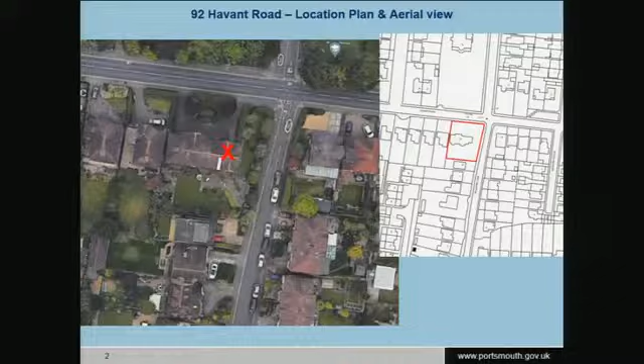So the application is up there in Drayton on the Havant Road. Very suburban environment with houses set back from the road, Havant Road, and from the side road, Mulberry Lane, including on Mulberry Lane on both sides. It's the corner property, you can see outlined in red.

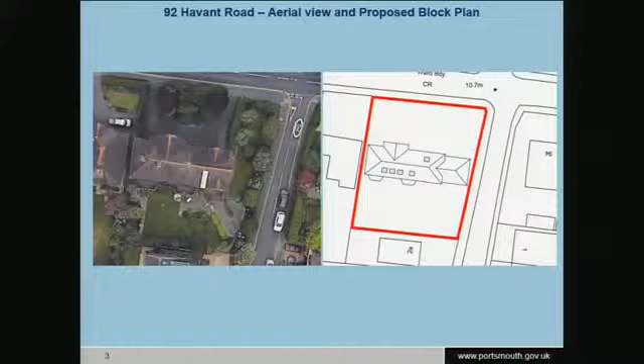Just in a bit more detail there. That is the side extension that is proposed, and then the other alterations and extensions and so on are around the rest of the building. I shall quickly take you further down in the slideshow to show the front and rear of the property.

I'll flick through back to the top of the show. There we are, back to that slide. So there's the site. The substantial 1.5-storey extension is on this side here, as you can see, up to the boundary at that point, just a bit off there because of the splayed boundary.

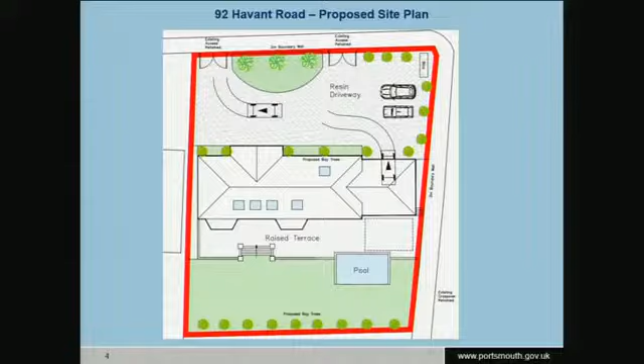And then we have a raised terrace at the rear, south facing, and a pool there. So there's the property you've seen as existing a few moments ago in the photograph. Suburban property, brick, half-timbered, etc. That's the minor gap in the rear elevation that they seek to fill.

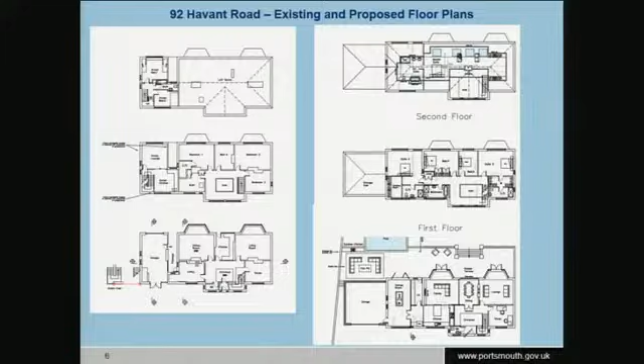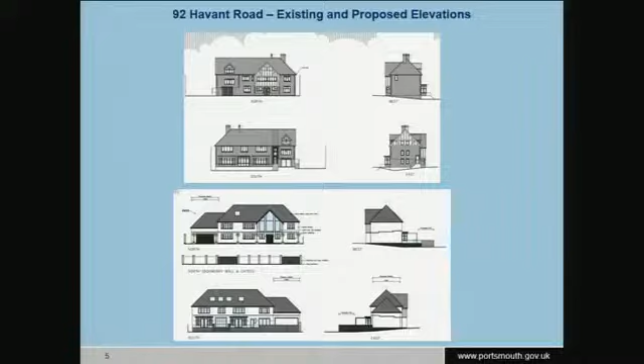We've had discussions with the applicant. We couldn't reach agreement. We were asking for this scheme to come a further metre off from the boundary and a further metre lower eaves, just to try and reduce the impact on that suburban lane.

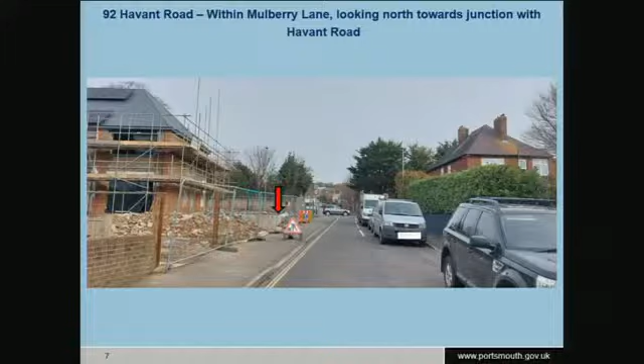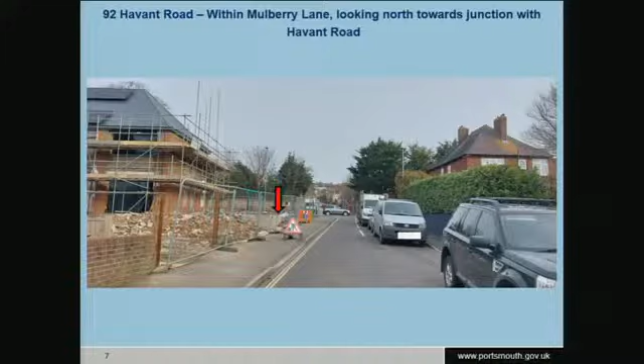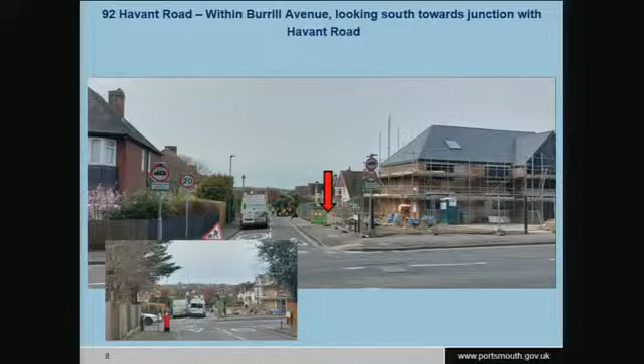Some changes already in evidence at the site: removal of vegetation, which doesn't require planning consent, and foundations put in for the proposal already. So you can see the position on the edge of the site that would appear. So there's the front boundary, northern corner from Havant Road, and the location of the extension to the side.

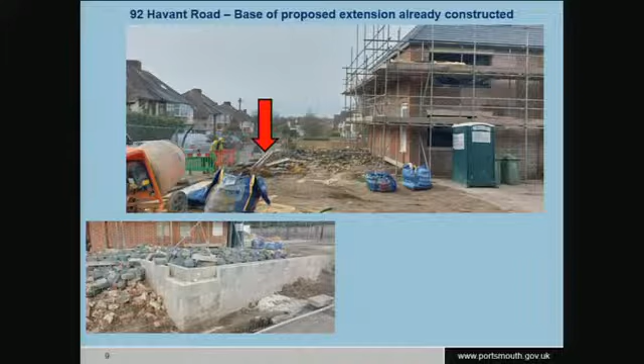That's on the edge of the site, as you can see. And there's, as was on Mulberry Lane, with the vegetation, and one has to picture now what will be proposed on the corner there. That's the long and short of the application.

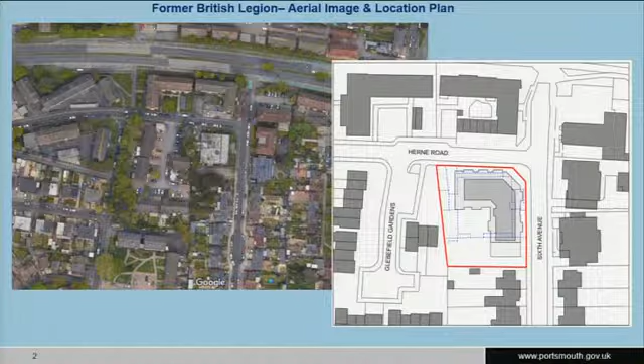In case we don't see another aerial photograph — we've got trees on the western side, just outside the site, which is why that area is empty. They're protected trees. There are also some conifers just outside the site on the southern boundary, in the neighbour's garden.

Here's looking south down 6th Avenue — there's the social club, here are the flats, and this is Herne Road running east-west. There's on-street parking on Herne Road, double yellow lines on the site frontage, and otherwise on-street parking in the area.

This is looking at the eastern edge of the site, with the next door property to the south. This is the eastern flank of the post-war development facing the rear of the social club — that gable end is there.

Some more pictures — there's the site on the left-hand side. The materials are quite a bright brick, I think, and some fairly buffy, lightish brick. I mention that now because of the materials proposed by the applicant. Here's the development sailing out, giving almost a 4th storey because of the land levels.

That's the blocked-off entrance to Southampton Road. This is Herne Road, so there's the social club, looking east. There's the church, a very attractive building, with its car park just there with access off 6th Avenue — the car park fronts onto Southampton Road. There's a 3-storey block of flats, the 2-storey community building use, and then 2-storey housing.

Right, onto the development. Here are the trees you can see that I pointed out earlier, and to the south as well.

So it's an L-shaped block, front door onto 6th Avenue, and a core all the way through to get out into the back and to walk around it, either into the car park or round into a substantial bike store.

So it follows the building or the back of pavement effectively, with an undercroft here to take you to the parking spaces here, a bit of a garden space, and 2 more spaces, car parking spaces off Herne Road.

The application was amended during its course to take off 4 flats, which also enabled more parking to get a better balance of flats to parking.

The pattern of development is a central corridor with flats either facing the rear or to the front, and they're a mixture of 1- and 2-bedroom flats.

That's the ground floor again. Here's the first floor, so there's the full footprint of development. Flats looking mostly front onto 6th Avenue, Herne Road, or south and west onto the rear of the site. A couple of minor secondary windows there that will be addressed by frosted glazing.

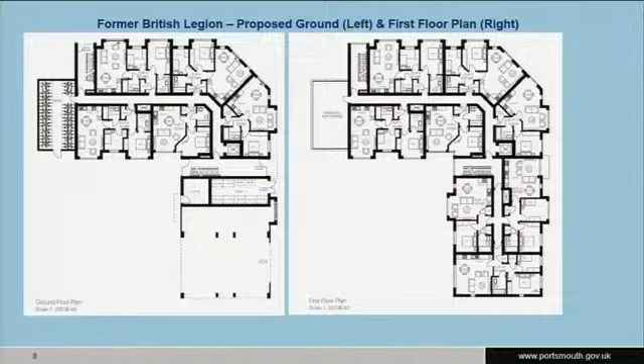So here's the 2nd floor, so 3 full floors, if you like, or nearly full floors of development. And this is the 4th floor, you'll see in a minute on an elevation. So it's recessed from the front, so it's a true roof additional floor, if you like.

So bigger flats with their own terraces. There's a terrace for that flat, there's a terrace for the 2nd flat, and a terrace front and back for the 3rd flat there. The other there is a flat roof just for maintenance access only.

This is what I call the principal elevation on 6th Avenue, so from the south heading up north up to Southampton Road with the increase in level across the site.

So this building also will need to slightly cut in and sail out at the other end, just like the flats. So this is a light-coloured brick proposed.

We would, if approved, deal with that by way of condition in terms of final selection. We've got a series of bays that provide interest to the site. This one looks a little bit flat, but you'll see in a moment a better 3D.

A base material, common practice, a darker base material to ground the site, and then a slate effect cladding to the recessed roof. So it would be pretty much read as a 3-storey building because of the recess of the roof, although it will be seen.

That's the front door. And that's the northern elevation to Herne Road, more of the same, really. Flats and habitable rooms.

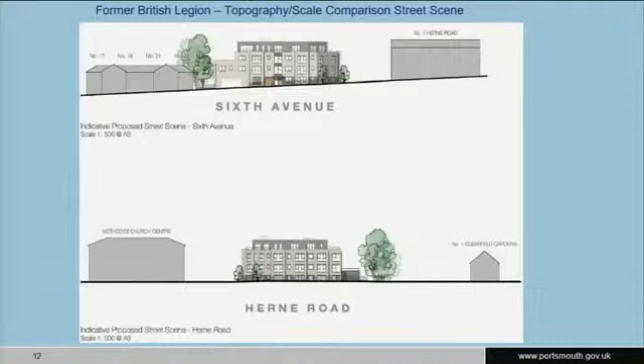There you are in a bit more context. The 3, almost 4-storey here, and the 2-storey housing to the south. And this is along Herne Road. There's a 3D to get a slightly better feel.

So we've got also architectural details. For example, apart from the articulation provided by these bays, which will give good shadow etc. and interest to the building, along with the choice of materials, and then the depth of reveals to the windows will also be important. I think the building will actually look quite good.

It's come to committee because of 18 addresses objecting, a variety of points which are set out in the report. But officers are satisfied about the scale of development, the adequacy of living arrangements, the lack of impact or reasonable impact on the neighbouring area and amenities, and the level of car parking in its sustainable location.

So that is why we're able to recommend it positively for you today. Thank you.

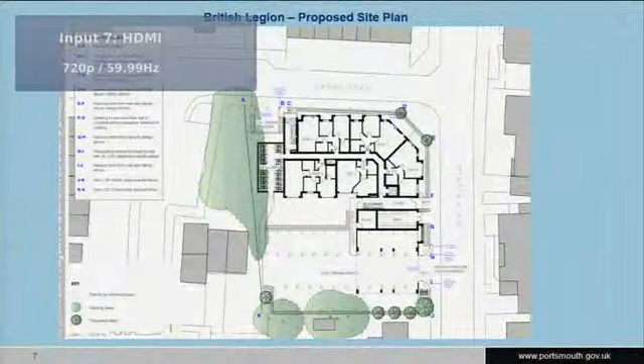Thank you, Councillor. Answering the question about the trees, there would be some minor trimming of the adjacent cherry just to the west of the site, which isn't deemed to be a difficulty for the health of that tree into the future. The trees on the southern boundary, because of the gap, are unlikely to require any trimming either. But although they're quite prominent trees, they're not protected trees. I don't see any difficulty if minor working space, for example, was needed to reduce the canopy somewhat. That would need to be in conjunction with the neighbour. And we do have the planning condition relating to tree protection during the course of the site.

So the tree matters have been looked at correctly in terms of existing trees. In terms of rainfall infiltration, nature conservation and landscape, I think there'll be a betterment here, which is what the Environment Agency and any planning authority would seek with new development. The betterment is because at the moment the site has drainage dating from the 60s or 70s, and I don't think there's any real infiltration on the site presently. This will at least have a relatively small lawn, but nevertheless a lawn, which will take some soaking in. And we'll have a full drainage scheme for the wider site to ensure the appropriate betterment and best measures are provided. We've consulted with our drainage consultants and drainage officer, who is happy with that, and full details will come with a condition.

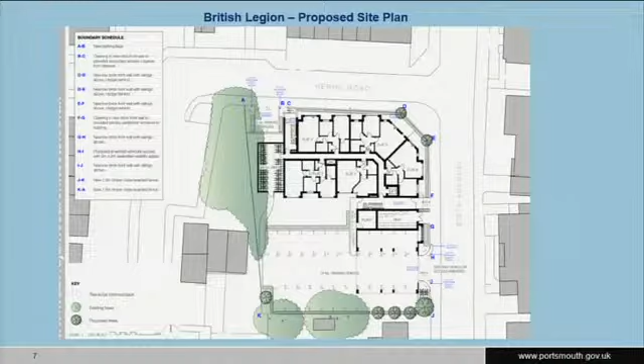Darren and then Hugh. Thanks, Chris.

I know height's going to be difficult, Simon, in this road because it's on a slope. But is the proposed scheme taller than the church, which seems to me the tallest building in the area? Excuse me. That's the church on the left-hand side.

I'd have to guess, Councillor, the church has got, it looks like 2 stories, but it's a church building with a different height. You can compare the height to the 3-story building adjacent. So I would guess the eaves height of the church building would be about the eaves height of the 3-story main body of the building, with the flat roof, recessed roof above. It's certainly within the scale of that building and the flats, the 3/4-story flats to the north. So if that's what your question is about, it fits in with the scale of the area. It would be on slightly lower land than the church as well. Thank you for that, Simon.

My other point concerns what you say in 10.12 and 10.13 of the report, particularly 10.13. It's around whether the scheme's viable, as you describe it, the developer's expected profit. In 10.13 you say the LPA's further analysis suggests that both a scheme with and without affordable housing may not reach the reasonable profit level. Now, we don't get many of those comments, so my guess is that you believe the applicant may not, but you believe that the current scheme will not reach the reasonable profit level. Is that correct? That's correct. Okay, those are my questions.

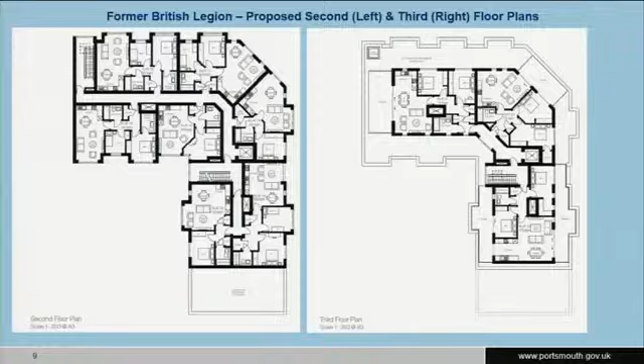Thank you, Councillor. I personally don't think it's so important because of the setback, which you can see here. That's a decent setback, a good couple of metres by eye. That's quite significant - lots of rooftops are only set back by a limited half a metre or something, or not at all. So that is a strong setback that is hard to represent in 2D, but it will be very recessive.

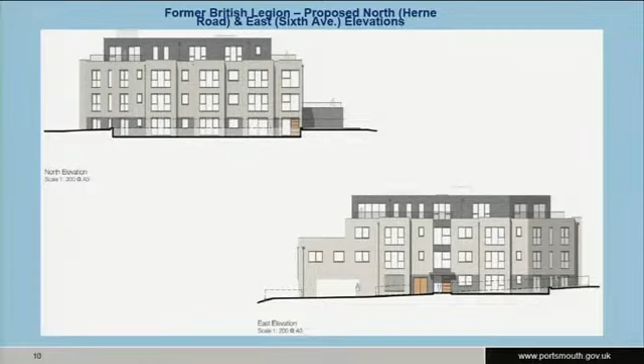Taking the east elevation, standing - this is the view you'd get from the first or second floor and the flats opposite, rather than from the public realm where you'd be lower down looking up. But I don't think it matters, to answer your question, that there isn't a window directly above this bay, because it's a different element of the building with different cladding, and it's set back.

Any other questions, members? Before we move to comments, Councillor Sanders. Chris, I propose that we defer a decision on this application until the 12th of April committee meeting. This is on the grounds of paragraphs 10.12 and 10.13 alone. My view from what I've seen is that I think this site should be developed.

However, for really the first time since the Kingston Prison development, we have a situation whereby a scheme with and without affordable housing - the scheme that was presented to the committee - may not reach the reasonable profit level, which in normal language means it's not regarded as viable in planning terms. I understand the officer's desire to have negotiations around how much affordable housing after a decision is taken, but...

I think, given that any scheme at the moment, with or without affordable housing, won't reach viability or the expected developer profit level, it seems sensible to have those discussions and then have the outcome come back to committee in three weeks, because we can't carry on for months with this. But a sensible period of discussion before a meeting would be useful.

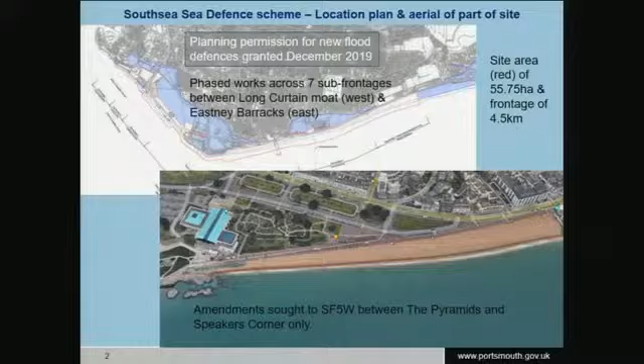The scheme is necessary to protect thousands of businesses and thousands of homes from sea flooding and all the resulting problems that would arise. Here's a brief slide reminding people of some of the storm events that have happened in more recent years.

Having briefly set out what the original approved scheme was 3 years ago — that scheme was on the back of the first tranche of funding from government, and once the first application had been approved, it was always known there would be another round of amendments for more detailed refinement and engineering. So the first planning permission granted at the end of 2019 then unlocked the second half of the government funding, which allowed the council and its partners to go on to work on the further refinement of the engineering, which is what is in front of you today.

That naturally resulted, and was always expected to result, in some changes to some of the details of the scheme, in this case sub-frontage 5. So the report sets out at bullet points in paragraph 12 the 4 broad areas: removal of the rock toe, improved public realm, soft landscaping, and reduced interaction with Southsea Castle, which is a scheduled ancient monument.

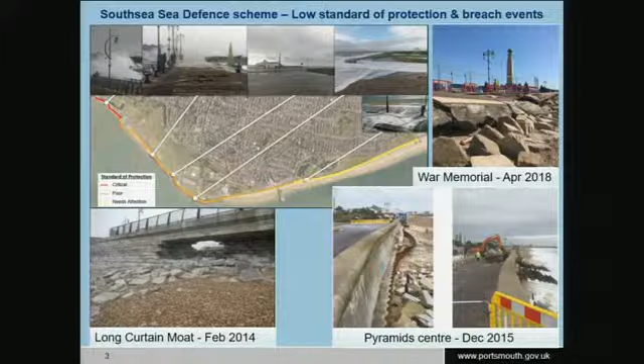So I shall try and take you through the principal changes. They're quite detailed and complicated drawings, but I'll make it as straightforward and digestible as possible.

Starting from the west, there's Southsea Castle and its eastern ramparts, grass banks and so on, and the pyramids just to its north. That was the approved scheme 3 years ago, which had a certain ramp rising up from in front of the pyramids up to the height of the promenade. That's been changed to, I think, follow more what is existing there, with a ramp down. At the moment there are only steps, so this is obviously for improved access down into the front. There's also been a remodelling compared to the approved scheme of landscape and levels.

Importantly, as the report sets out, the approved scheme had a strong intervention of a supporting wall into the eastern ramparts of the scheduled ancient monument, and obviously with any such structure you want the minimal amount of intervention. So with the second round of resource and further time to redesign, a less intrusive design has been arrived at for the interaction with Southsea Castle. It still provides the necessary strength and engineering, but it's less intrusive.

So in a nutshell, there are some more attractive changes with the steps, the paths, and some rounding off of the existing grass banks. So it will appear as a better solution than existing or previously proposed. In terms of the rock toe, that is the area at the top of the beach alongside the promenade.

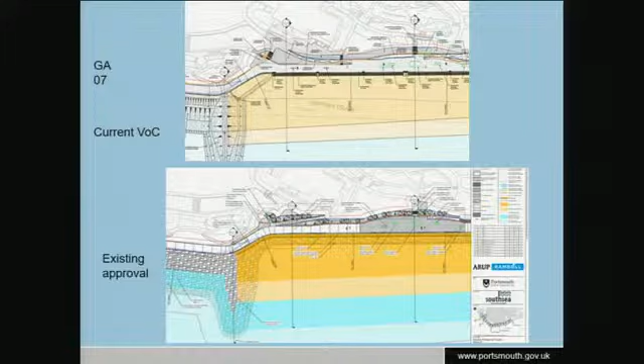So onto the eastern half, we have the Briny restaurant there, and just the lifeguard shelter to the west, just out of shot.

Some remodelling is occurring at Speaker's Corner, which is the area behind the shelters - that's the clear tarmacked area popular with skateboarders. That's been remodelled for ramps and some terracing. Previously there was a straight, vertical wall, which was less attractive. It's now being stepped down, and you'll see some images in a minute, that requires more depth. So the promenade is being reduced by 2 to 3 metres from the approval, but with significant gains for the character of that particular area.

The height of the promenade remains, as previously approved, 80 centimetres higher than the existing. In a nutshell, those are the principal changes.

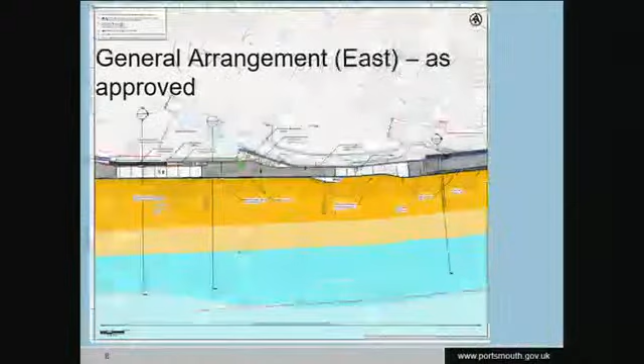I'll skip through these perhaps and try and find you some images. There's the rock toe as previously approved, and a massive sheet pile, steel piling. You can see much less of an intervention there, but nevertheless it performs the function of a coastal defence. And there's the higher beach compared to the existing, but that is no change from the previous approval.

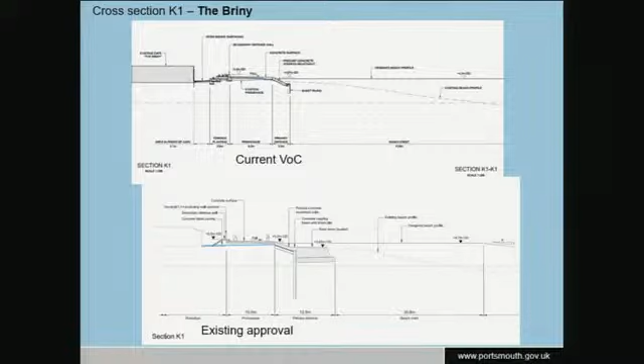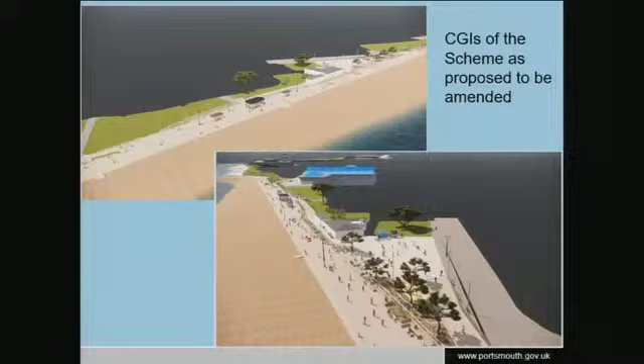New terracing in front of the Briny, a better environment than previously approved. And the new terracing and steps and landscaping at the eastern end of Speaker's Corner. Slight reduction in space, but it is a generous space, and a generous space would remain for whatever uses, in particular skateboarding.

Just a bit more detail, again looking west towards the pyramids and the rock gardens behind Speaker's Corner, dropping down there. So this is inside Speaker's Corner, looking east towards the pier.

So here you can see this sort of landscaping wasn't there before. This is another one of the clear aesthetic improvements resulting from this variation of condition application. Some terracing - effectively these become seats, and in fact it almost gets a sort of amphitheatre-like effect into this space.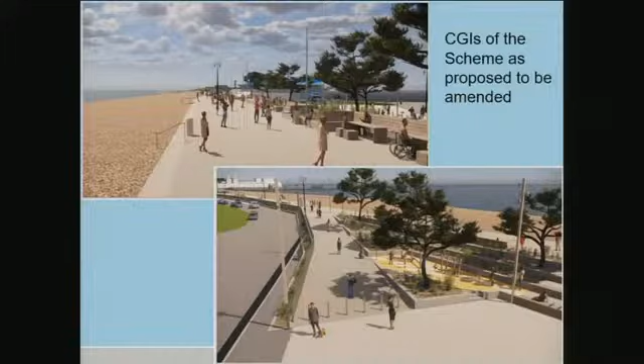There it is more widely, and then with the actual steps there, and then there's a ramped access there and further to the west off the edge of the picture.

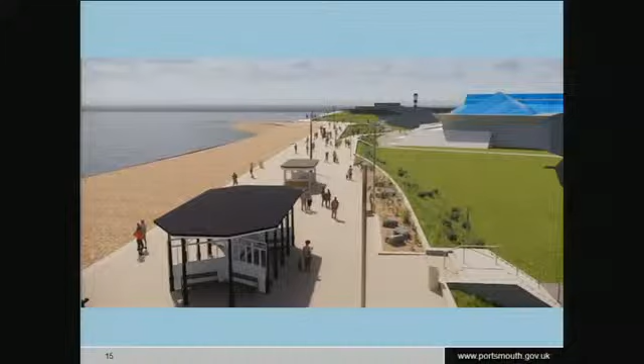Another image, so that these would be the rock gardens, not a flat lawn, as it looks. New steps up, repositioned steps, repositioned principal shelter, there's a second one, and the calmer environment at the Southsea Castle.

That's the eastern ramparts of Southsea Castle looking west. This is the area of less intervention now, with just some remodelling and so on.

Here's the new steps to replace the existing flood barrier, but it provides the same function clearly, with careful choice of planting appropriate to the marine environment and all the salt. There's a longer view again.

There's the front of the restaurant, currently occupied by the Briny. Because of the rising of the promenade, their view would be reduced of the sea, but that's unfortunately inevitable. But this is a much better, more attractive environment placed in front of the restaurant than previously shown. Again, you've got the nice landscaped terracing.

I think that is the long and short of it. And just for completeness, there were a number of objections to the scheme as per previously. Some of them perhaps didn't quite understand the scheme and were misdirected, but we've answered them all at the back of the report.

And then as per the Supplementary Matters report today, the SMAT, we just want to clarify that one of the objections was from the volunteer lifeguards, just to the west of the Briny restaurant. They were concerned about the raised height here of the promenade.

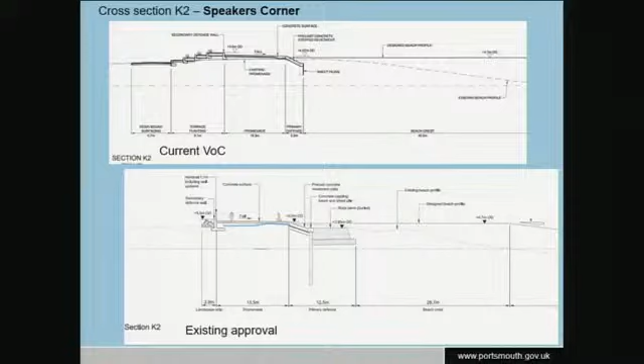No, I don't think so. I think there are certain points we saw. We go back to the previous image, because most of the time... I'll just check on the plan as well. I think at one point it was going to be that the steps extended quite a way along, so people would sit on the steps as well as using them for access and egress.

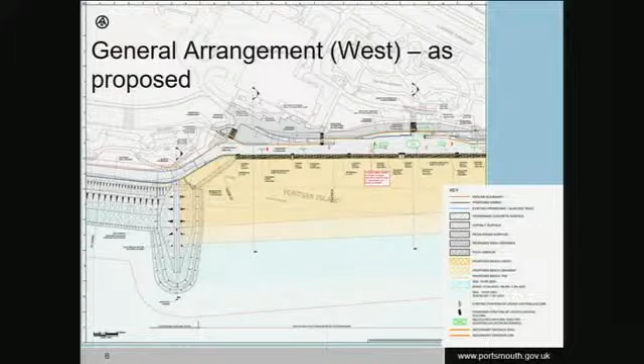I should just, here we are. There are periodic points, Councillor, because the beach is supposed to be, as it is now, pretty much not a small drop down from the current level. You can see access points, or I can point them out to you. There's an access point of steps, there's another one. I think the beach is at an unusually high level at the moment. Another one and another one. But yeah, there was.

I can see the need for special types of steps to go down, because the steps are at a required level, and they might need a rail. And there are clearly a few of those.

What is the finish going to be on the areas between the designated steps? It looks as if it's going to be a kind of step-like structure all the way through. Actually, looking again at the plans, I've been pointing out ramped accesses, and I think the stepped apron actually extends all the way along. Thank you, the applicant's nodding their head, so I've read that properly now. So good access along the whole beach, Councillor. That's what I hoped for and what I thought, and thank you for communicating that, because that will also provide places for people to sit, and will make it easier to get lots of people on the beach easily, and I'm glad there are ramps. Thank you, that's what I needed to know. It was a useful nod.

Councillor Smith: Could Simon just tell us a little bit more about how less abled access is going to be to the water?

Disabled access, or less abled access, yep. I'm looking at, there are ramped beach access points. I can see 4 along this section, so I don't know their profiles and so on, but I would imagine they have less abled people's access in mind, clearly. So there are 4 of those along this section, which isn't that long, so there seems to be reasonable provision there, I would hope.

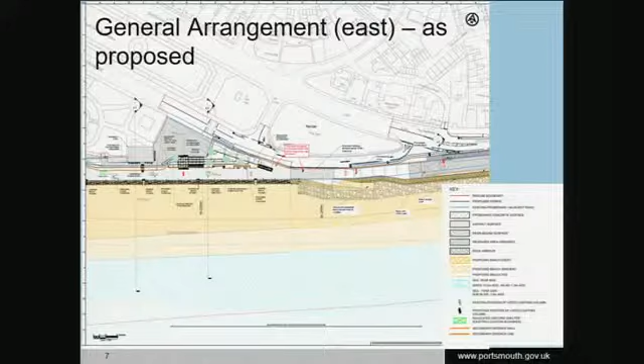I don't have an area figure. We'll see if that can be generated or not. I'm just trying to show it here and describe it. So this is the approved scheme. That was more or less a triangle with the ramp, a similar ramp there. So the area eaten into by a limited amount is the terracing and the planting that we've seen in the images, with still the biggest area of the original triangle retained. So we appear to be losing a bit in this sort of area here. I'm afraid, Councillor, I don't have comparative figures of the areas of the two remaining areas of flat space. Sorry.

Okay, Councillor Smythe. I was going to ask if it would be at all reasonable to put in a condition to allow for a longer route for wheelchairs to take down to get into the beach, following on from Councillor Smith's comments about wheelchair access. I wouldn't imagine that would be necessary at the end of every set of steps, but whether some sort of examination of that could be put in as a condition, seeing what the feasibility would be of producing better access for those with impaired mobility, possibly using a wheelchair to get into the sea at certain tides. I realise that's difficult because of the shingle moving about, but I think it would be better to have something slightly more permanent than what we've got at the moment.

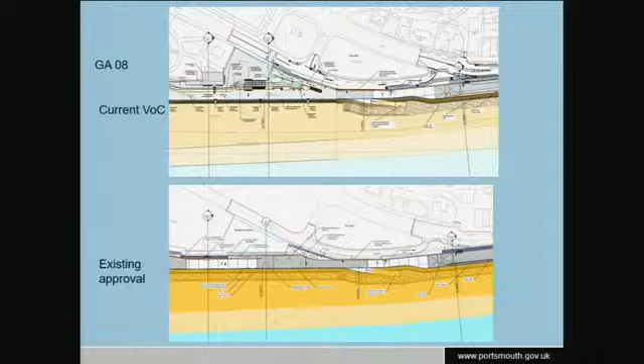And my final point is just a technical one. The letters A, E, and P are repeated three times in the report. What is it? There's no explanation of what it is. It sounds like it's a significant flood event from the context, but just a technical thing. If you don't know, I'm sure the Coastal Partners team would know. Yeah, I'll try and have a go, but I probably won't know. Do you have a paragraph number, please? Thank you, Hugh.

It's paragraph 2.18 and also 15. Thank you, I shall look to the applicant. I thought you might.

Yep, so the letters AEP stand for Annual Exceedance Probability, which is the likelihood in any year that an event will occur. Right, thank you for that. That was beautiful, thank you very much. Those are my questions, Chris.

Darren, you are a repeat offender of keeping your microphone on, by the way. I know you may want to hog the live stream, but please do let other people have their moment. Okay, Councillor Vernon Jackson.

The bit of feedback I've had is concern about the loss of the shelter at Speaker's Corner. I know there is a proposal that there will be a shelter. Can we see where that is going to go?

I see my colleagues on the other side of the room looking if they can give us an answer. I'll try. So the long shelter at Speaker's Corner, which runs at the back of the prom, is proposed to be removed and was approved to be removed, and that remains the proposal in front of you. You've seen where the landscaping, steps, and so on would go, more or less in the place of Speaker's Corner, those shelters.

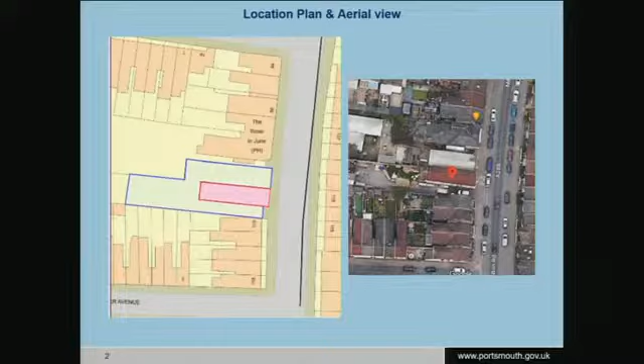That's the access on the left, down between the buildings. This is the application site. And the building on the right is the commercial building that, as I say, is close to getting planning permission for its extension upwards and conversion into 4 flats, just for completeness.

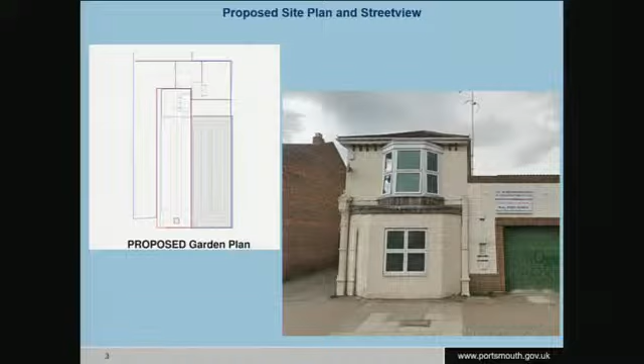There's a slightly side view. So this is the existing house. Under permitted development rights, the property has already had roof extensions, a long side dormer, I should say, on the south side there, and the same on the north side, facing across the pub, to provide windows up there.

Internally, the existing floor and ceiling has been taken out and lowered, so they're able to insert a new story to achieve 3 stories. The site, as the report sets out, had planning permission to convert into a Class C3 or C4 flexible use, but that has not yet been implemented. Hence this application from C3, it's direct to HMO sui generis for 8 people.

The site, as we saw before, the access is on the off the vehicle access to get into the building. There's no front door, it's a side door there into the house, and you would emerge into a sort of dumbbell communal area with a kitchen on one side and the communal room on t'other.

And then the rest of the property has bedrooms with en-suites throughout, 8 bedrooms, 1 at the back, 1 at the front. There's also a communal toilet there downstairs, a 3rd bedroom, a 4th bedroom, a big one there, a 5th bedroom, 6, 7 and 8 bedrooms in total.

While we're looking at the layout, in terms of your SPD guidance, the rooms are all particularly large. This is on page 84, table 812. The bedrooms are all particularly large, which means the communal kitchen dining area can be exceeding the 22.5 measurement. It is way beyond that at 31, and then all the en-suites, etc.

So in terms of living accommodation on size standards alone, it offers a spacious property, and then because they're all good size rooms and so on, there's no difficulty in terms of the layout of any of the rooms either, including the dumbbell sort of almost split rooms that you see on each level. But I think that's pretty much as existing as well because of the stairs through the middle of the property. So in terms of internal arrangements and living accommodation, officers are happy with the standard accommodation.

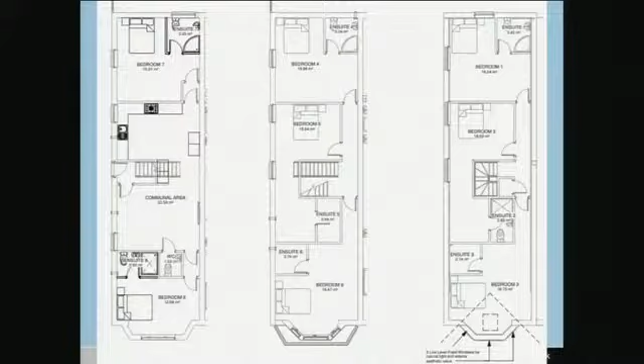There are some elevations to show the physical changes to the building under permitted development.

Here's the HMO count. No other HMOs found in the area in the 50-metre radius. This one would provide a figure of 1.92, so within the 10% threshold, the indicative threshold for a sustainable community.

We have 4 objections setting out parking and local infrastructure concerns, and then Councillor Sanders has called it in for decision. There are no supplementary matters, so unless I've forgotten anything, those are the key points for you.

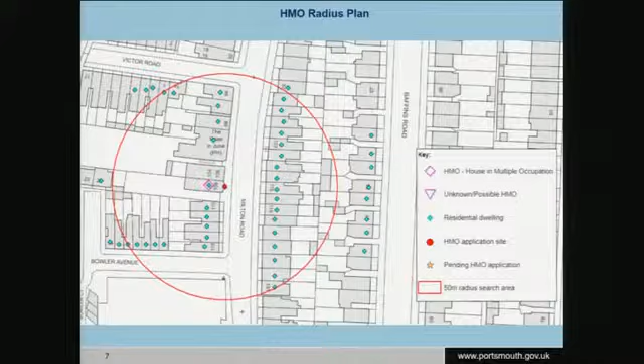Good morning, or afternoon actually. As you'll all be aware, at Apical PDM we always strive to achieve the best shared living designs for both our clients and ultimately the residents of the property. This particular property is no exception and exceeds all the high standards put in place by Portsmouth City Council. When this property was purchased, the building was in an extremely poor state of repair and the current tenants have found somewhere else to live.

The property had a number of issues with leaks, mould and damp, and required a significant amount of money spending on the property in order to bring it up to a livable standard. Our applicant, in purchasing this property and spending in excess of £150,000 on the renovation, will be able to offer 8 individuals good quality accommodation finished to a high standard, for which there is a need in Portsmouth.

Not only will the property provide an excellent standard of accommodation, but the applicant has ensured the longevity of the property, thus ensuring it did not lay vacant and unfit for purpose. It's important to remember a 10% HMO density restriction has been put in place by Portsmouth City Council to ensure mixed and balanced communities remain.

There are no other HMO properties within the 50-metre radius of this property. Therefore, it can be argued that there is a lack of shared properties available in this area for which there is a need. In addition, as noted in the officer's report for committee, the Council cannot currently demonstrate a 5-year housing land supply. Therefore, any planning decisions should be based in favour of sustainable development. If this proposal is approved today, this would be a positive contribution to the shortfall of housing in the city.

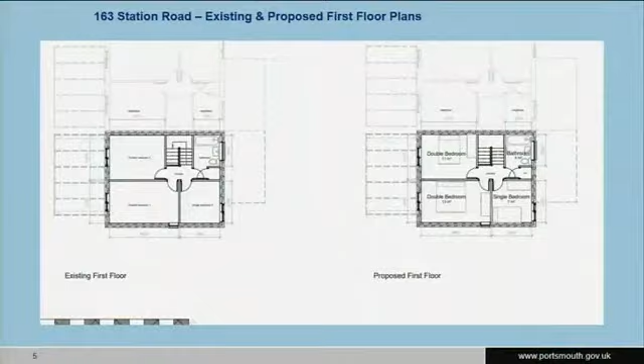There is one other HMO - I don't think we have the slide, no we don't - but the other HMO is just tucked away opposite. So within the 50 square metres, 50 metre radius, it's 2.17 currently. This would double that to 4.35. It's a small number of properties in the area in the 50 metre radius, hence the changes, but it's still at 4.35, so within the 10% guideline threshold for a sustainable community.

The shared bathroom is absolutely fine, as is the ground floor WC. The living room, there in the middle, at 22 square metres, is bigger than the 14 metres required. This is less usual for us, to have separate rooms - normally we have a communal living kitchen room in Victorian or Edwardian properties. Here we've got 3 separate rooms. The conservatory at 15 square metres, as a second living room, is a square metre larger than required. And then the kitchen at 7 square metres is 4 square metres short of the expected size.

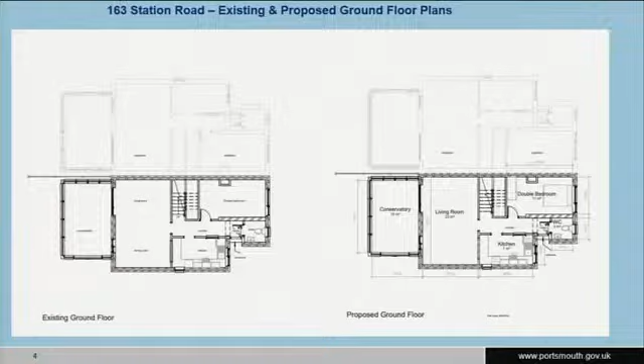The application has come to committee because of 8 letters of objection: concentration of HMOs in the area, parking, antisocial behaviour, living space, retrospective application and a fire risk. I think we've dealt with those through the reports - you can see on-street parking isn't necessary as it has its own parking forecourt there. Thank you.

Thank you, Simon. Members, questions? Judith - is there any cycle storage? Not shown, but we've asked for that by condition.

Two questions. The first one concerns the conservatory - conservatories can either be living space or not be living space, depending on how they're constructed. How is this one roofed?

Thank you, Councillor. Because really, that's my point - depending on what the roof is, it'll either be living space or somewhere where you would not wish to spend your winter afternoons.

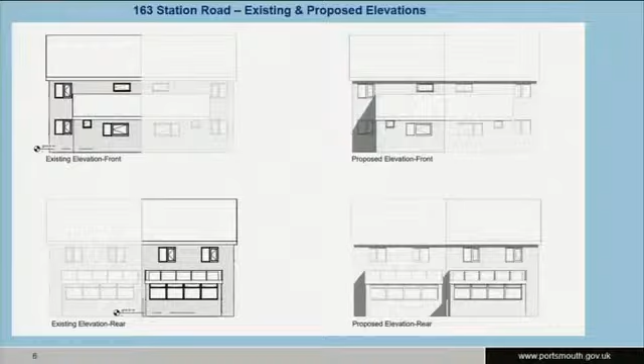Those plans indicate glazing, and I've got an aerial photograph, and it does indeed look like glazing of some sort, whether it's a plastic type or glass type, I'm not sure. The orientation is northwest, so in terms of overheating, it wouldn't catch the sun until afternoon - it's not a south-facing conservatory. Whether it would get warm enough, Councillor, that's a matter of judgment. Okay, I'm a bit concerned about that.

My second question concerns your report, 5.7: if the property is operated as a Class C4 small HMO, this would have an effect on the ratio of communal and amenity space compared to private bedroom space available internally for future occupants. Can you unpack that a little for me, please?

Struggling to, Councillor. I obviously read it before, but I'm not quite sure what the case officer was trying to say here. Or am I? I'm not entirely sure, but I think perhaps we can disregard that sentence if none of us can quite understand it, and move on to the rest of it, which I hope I have taken you through and is a bit clearer. Sorry, Councillor.

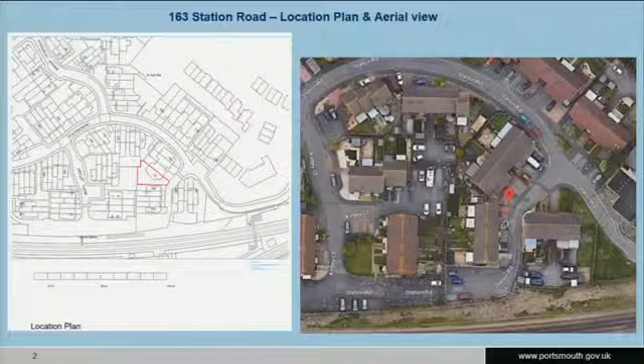Thank you, Kieran, and you were quite right to do that application. We finished before 1 o'clock. You were quite right. Those of you who need to leave, please do. Okay, and we shall move on to Toronto Road. I have 25 minutes before I need to go.

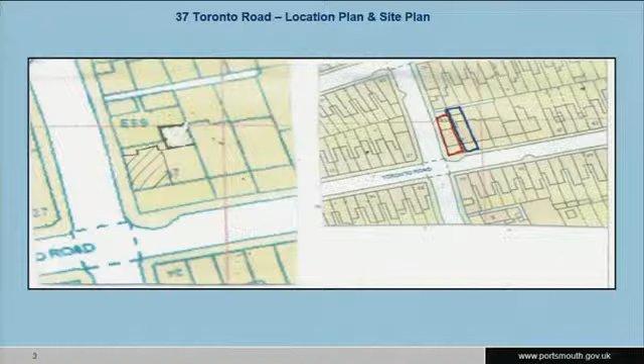The current property would be retained within the blue edge, and the application site is the red edge next door. This is perhaps more helpful - the property has a side garage constructed under previous consent, so it's effectively double width compared to the rest of the terrace. The application is to build on top of that garage and convert that space into a dwelling. So build here and convert that into a dwelling. The current house would lose some of its current space.

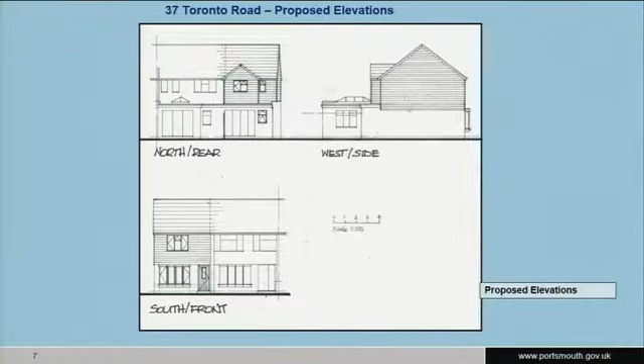There's the existing front - the single-storey garage will be built up and converted with elevational changes to form that new dwelling. So the existing side wall will be built up into that dwelling. I'm afraid the plan drawer has rotated the plans, it doesn't help. There's the front on the existing property - that's the garage they built, with a side extension effectively, and the flat roof above. If you flip it through 180 degrees, the garage will be converted into a living kitchen room, and the new build above would provide 2 bedrooms and a bathroom.

The national space standards are met. We consider that a development in that area is fine in terms of streetscape, and indeed a previous extension was granted there not so many years ago.

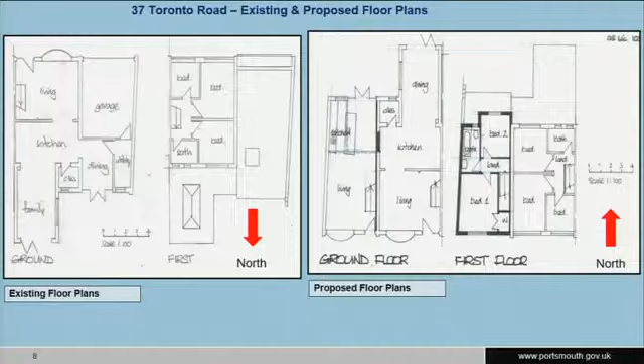Some objections, one letter about parking, and we have the Highways Authority concerned there. Given that it's in a very sustainable location, with local amenities just off to the west, a local shopping centre, buses, train station down the road, the city centre - we're right in the middle of the island here - we didn't think a reason for refusal on parking could be sustained.

I've been up a couple of times during the week to see what evening parking is like. It is busy, it's full. There were the odd space - I found a couple there and one there and one there. But I wouldn't argue that there's acres of on-street parking available. So that is the one issue I haven't quite seen eye to eye with the Local Highways Authority on, but with the importance of providing new housing and the sustainable location, we do feel we can support it as officers.

No updates, and I don't think any deputations. Thank you, Simon. Members, questions? Councillor Bernard-Jackson.

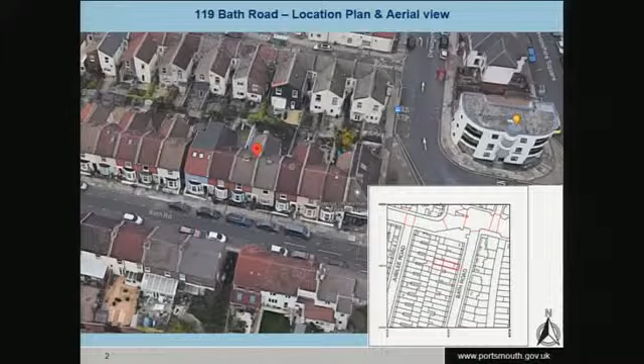Let's move to Bath Road. Thank you, Chair. This is an application for a lawful development certificate, 119 Bath Road, for a rear dormer and roof lights to the front roof slope. This application is only at committee because the applicant is a member of staff at the City Council. It is the 5th property there - the red dot is on the 2 of them, it's the 5th one here. Traditional terrace property just south of Devonshire, you might recognise that building where the island splits. So this is simply it.

There's the front roof slope dormer, roof light that sits below the 0.15 metre maximum plane, so it's within the tolerances of the permitted development order, so that does not require planning consent. The rear dormer similarly is of sufficiently small size, doesn't front the highway, matching materials etc, so that too does not require planning consent. So the application for confirmation that the development is indeed lawful without the need for planning permission should be granted, the certificate.

Okay, questions, comments? I shall move the officer's recommendation. Gerald, are you seconding? Those in favour? That was unanimous approval. Thank you, Kieran.